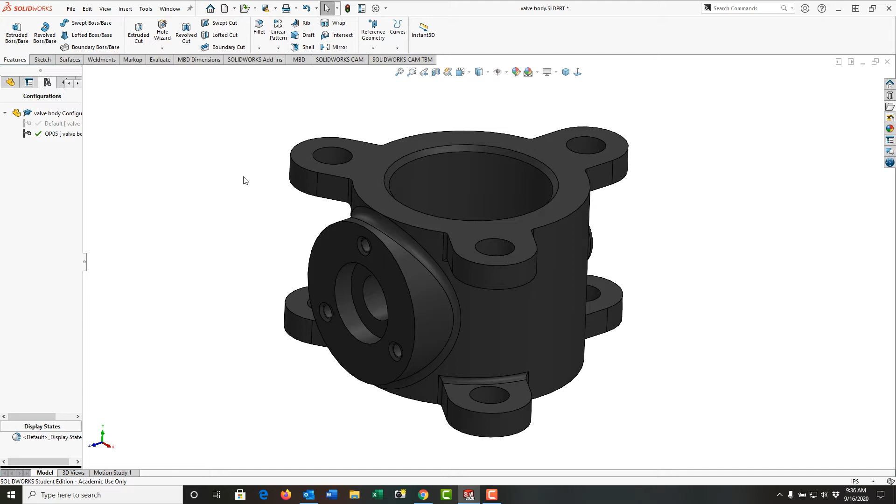So to do that, the first thing I'm going to do is go to the configuration manager. I'm going to right click on the valve body, and I'm going to add a configuration. I'm going to call this op 5, and the description is going to be the as cast part. So I'm going to say OK. And then, as I stated earlier, notice the appearance is gone, because the appearance was only with that configuration. So right now I'm focusing on making the as cast part.

So as I said earlier, there'd be 1/8 of an inch above this. So I'm going to select this surface and I'm going to create a reference plane 1/8 of an inch above it, or I can just extrude from this surface. Now the outside profile of this would not be machined. That would stay as cast, so I don't have to worry about it. So I either create my offset plane or I just work from this face. In this case, I'm just going to work from this face.

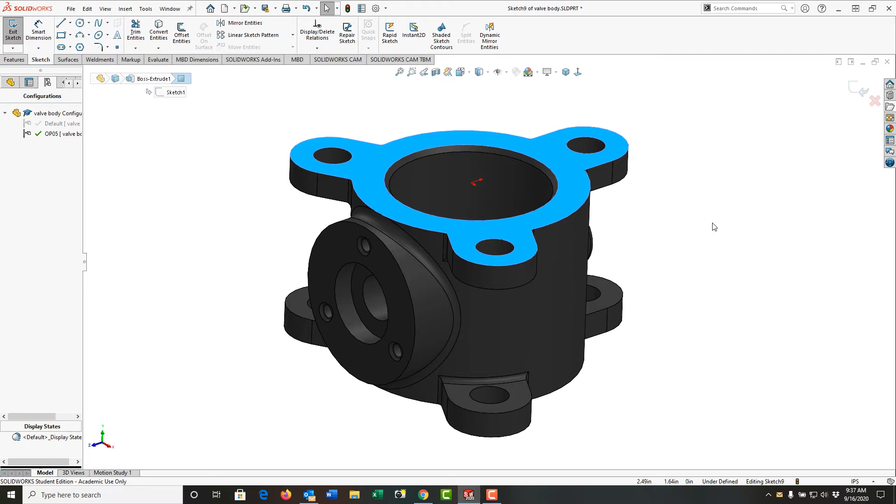So I'm going to select the face. I'm going to make an extrude boss, and I'm going to convert all the outside edges. So I'm just going to click on white space so this isn't selected, and I'm going to say convert entities. I'm just going to select an edge by right clicking, and I'm going to tell it to select the loop or select the tangency. So I'll say select loop. It's got the correct loop, and I'll say OK.

And then the next thing I want to do is I'm going to offset this bore in 1/4 inch. So I'm also going to offset the entity. I'll select this circular edge. I'll set the size up to 0.25 because I want to remove 1/8 of an inch material. It's going the wrong way, so I'll reverse it and I'll say OK. So I have my 2 sketches.

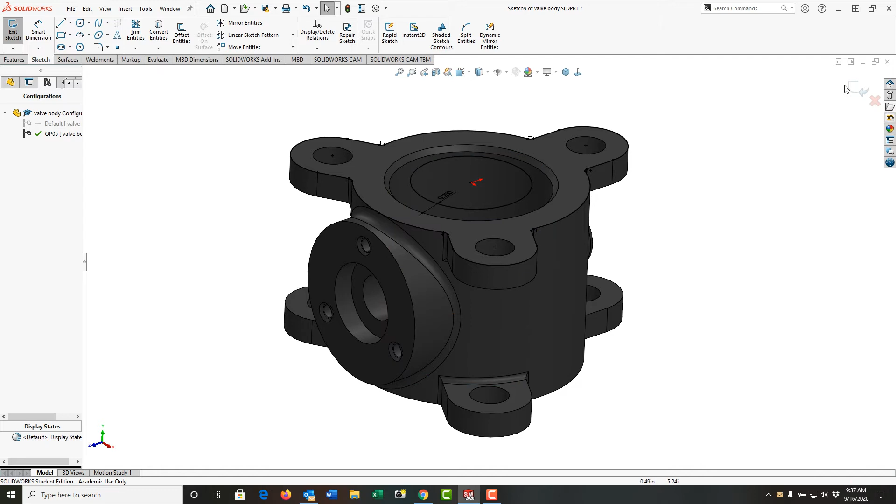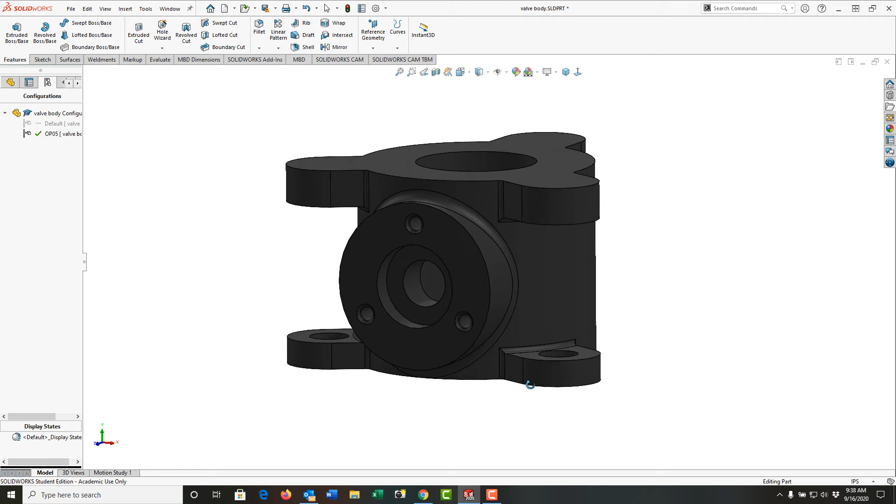I'm going to exit the sketch and I'm going to go up that 1/8 of an inch, and then in direction 2 I'm going to tell it to go up to surface, and I'm going to choose this face. And that now represents the as cast part. I would do the exact same thing on this base. And then I would come around here and I would also do this face. So I've converted the edges of the bottom and also made this as cast.

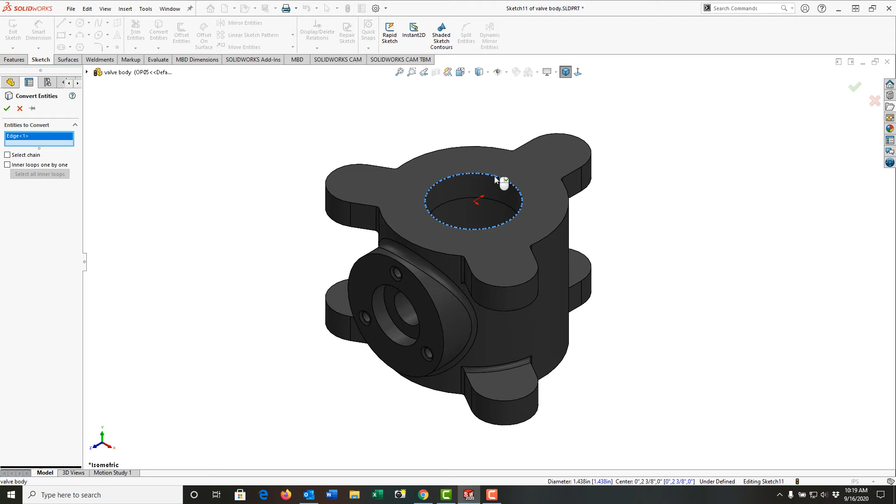One of my next steps is to finish off the inside bore. So I'm going to select this face, I'm going to do another extruded boss, and again I'm going to convert this edge. And then I'm going to convert this outside edge. I'll right click to accept that. And because it's converted, I can drag its endpoint around and make it a closed circle.

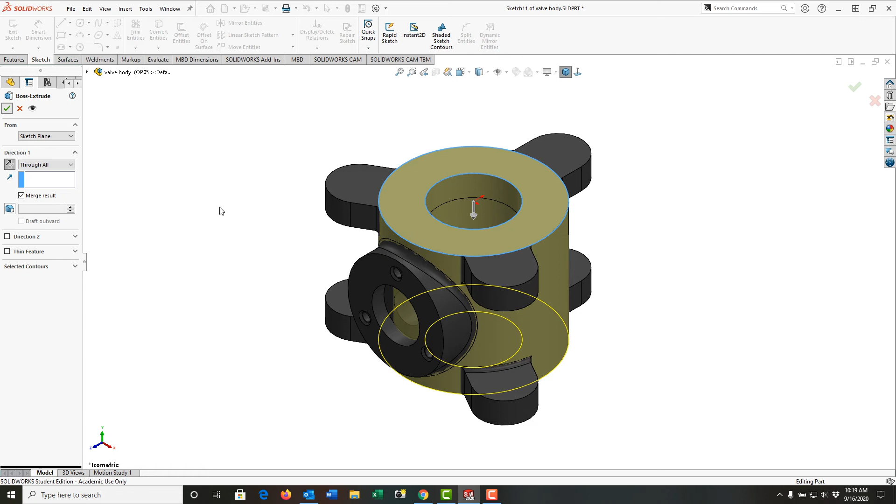I'll right click to exit my sketch. And I'm going to extrude that the opposite direction. I'm just going to use the through all. I'll say OK. And now I have that as cast.

Next, I'm going to close off this. So I'm going to select this face. Again, I'm going to make an extrude boss. I'll click in white space so it's no longer selected. I'll convert this entity, and I'm going to assume this would be solid and there'd be no hole. So I can accept that. I'll right click to exit my sketch.

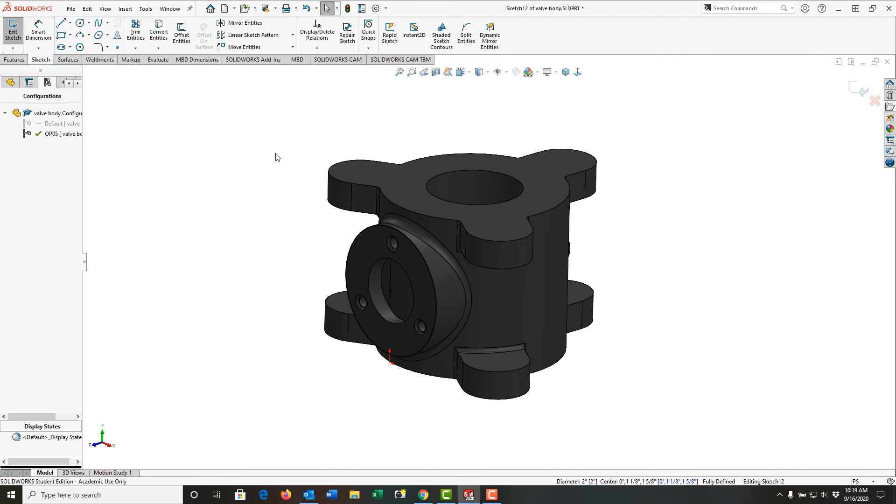And I'm going to go 1/8 of an inch this way. And for direction 2, I'm going to tell it up to surface. I'm going to rotate around, and I'm going to come up to this surface. Unfortunately, that's not the end I want, so I'll have to change the end condition. Let's try up to next, and that works. So I'll say OK, and now I've filled in everything.

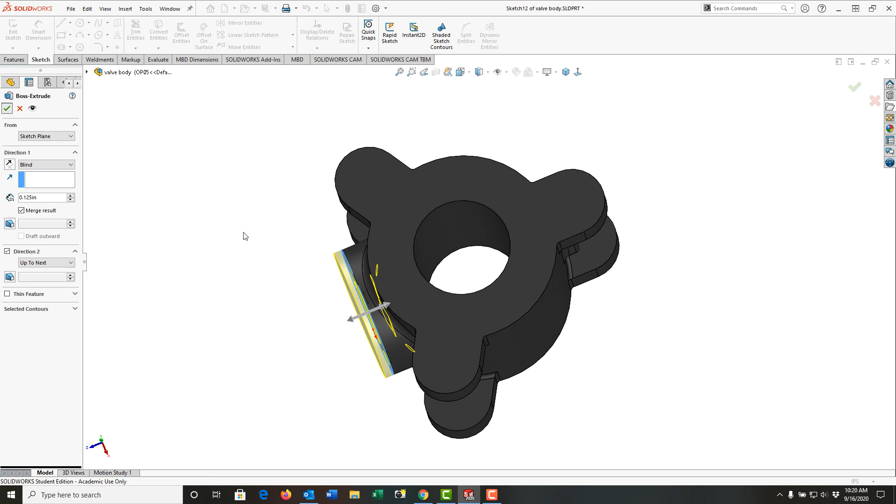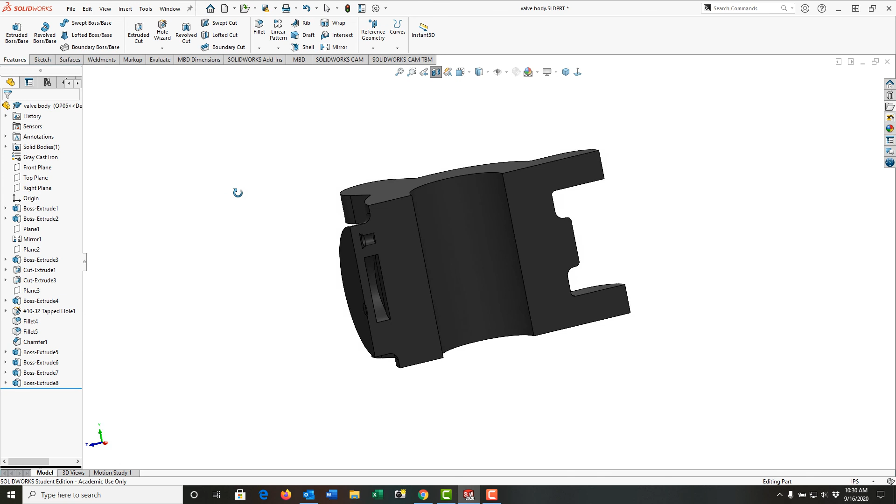Now I think my part's done, but I can see this, so I suspect there's holes still in there. For the purpose of this assignment, that would be fine, but let's double check. So I'm going to select the right plane, and I'm going to create a section view. I'll say OK. And yeah, as I suspected, there's holes here. Again, for the purpose of your assignment, that's fine.

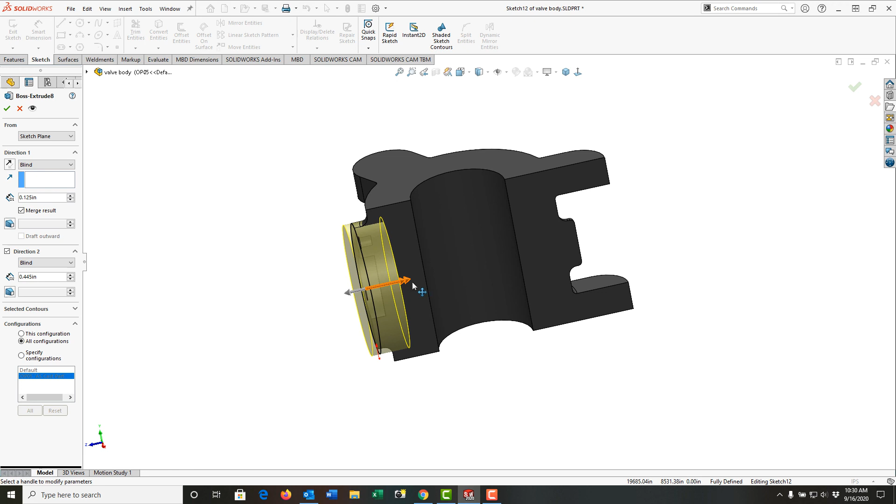But to fix that, I would come back to the Boss Extrude. I'm just going to select it. I'm going to edit the feature and I'll change the end condition. So rather than up to next, I'm going to put it back to blind. And I'm just going to grab this arrow and drag it in here. I'm going to have a look. Just want to make sure I don't go into this inner hole. I think it'll work. I say OK, and yes, it does work. So I'll end the section view.

So this is almost ready for as cast. The last thing to do is to add a fillet around all these sharp edges. Again, if I don't, there's a chance for cracking. So I'll make sure I fillet all the edges, and then I'm ready to move on. So in the next video, we'll look at how I would create the next configuration.